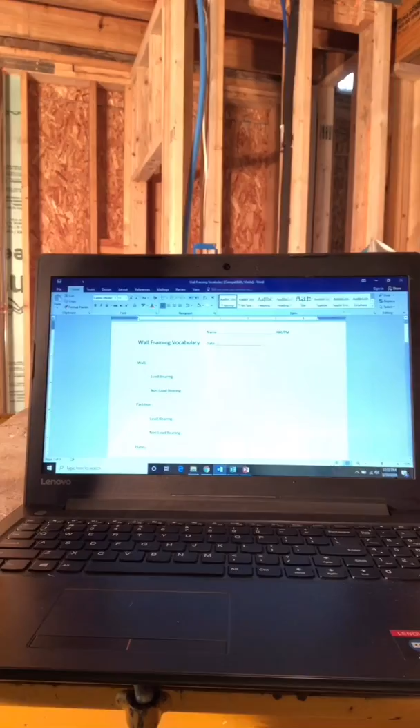If you go online, which I posted yesterday, I had said that you want to download this and you want to start filling it in. So yesterday we did walls, load-bearing, non-load-bearing, partitions. This was your assignment for yesterday. So today we're going to continue on this vocab sheet. We're going to start with plates and we're going to go on down through several of these.

Okay, plates. Plates are the first thing that we lay out on the wall. It's where all of our layout is done. This is where we put all the markings of everything, and we can equate plates to floor framing. That would be the band joists where we did all of our layout marks on there. So these would be the plates.

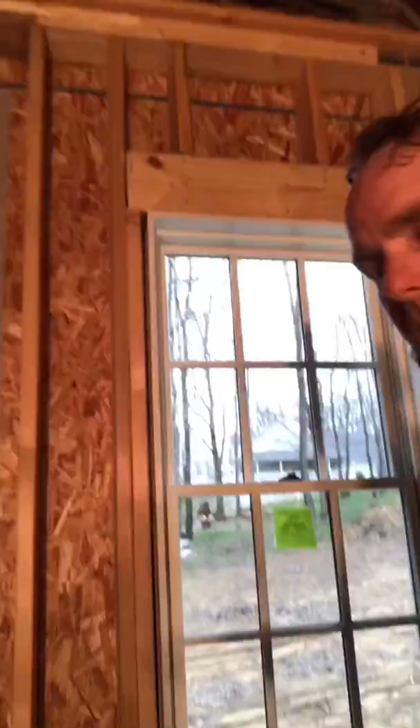In a wall system, you have 3 plates for a typical residential framed wall. The bottom plate, the top plate, and the double top plate, which is up there. So really when we start laying these out, and this is another day's exercise, we lay out the bottom plate and the top plate together, just like we lay out the 2 band joists.

So this is wall framing. This is called plates, not band joists. The plates run the entire length of the building. Anywhere that you have a wall, you're going to have a plate. Depending on the type of wall, you may have 2x6 walls, such as these ones, or you may have 2x4 walls, as we have right here in this partition wall.

The reason that we go with thicker walls is because of the amount of insulation that we want to put in. Typically, that's the only reason that we're changing the thicknesses of the walls. But for most cases, 2x4 walls do suffice, except where you need excessive insulation, like on an outside wall, because of what the building code now calls for.

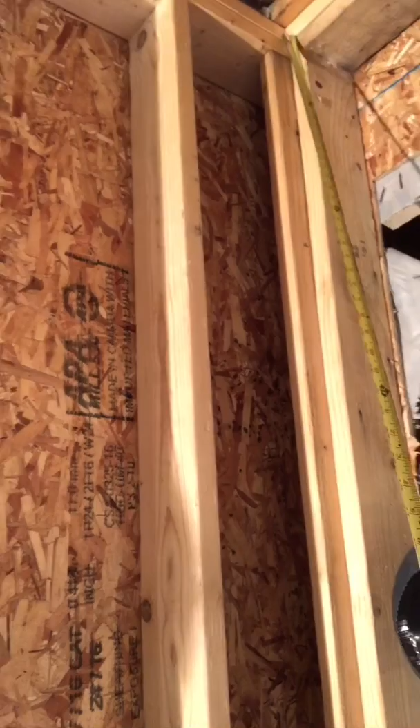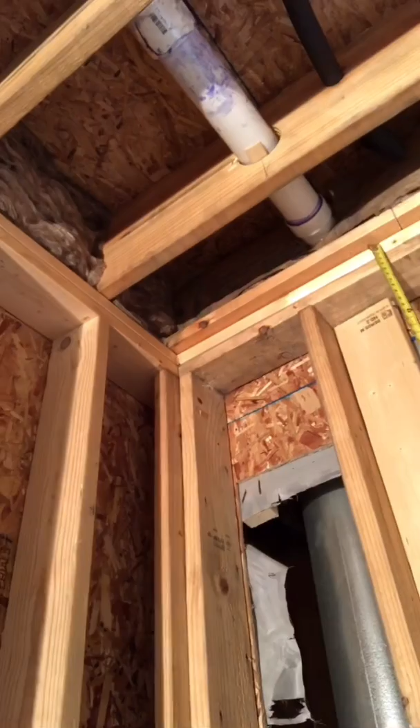The double top plate is an extra board put over top of the wall to stiffen the wall up, and it allows for when we have a splice in the wall. Right here we have a seam, a joint where this wall touches this wall. So how do we tie those together? It's with the double top plate. The double top plate on this wall runs clear through. It stops short, and the double top plate on this wall runs clear through over top of the load-bearing wall.

And the other purpose is at butt joints in your wall. See how we have a butt joint on the 2 plates of the wall? Well, the double top plate splices that over. Now this piece of wood up here, don't confuse that with a wall component. That's just another scrap piece of wood that's nailed down over top. That is a drywall catcher, just something to screw drywall to. Bottom plate, top plate, double top plate.

So we have our vertical members in the wall, the framing members. These are called studs. If you compare it to a floor system, like up there, those are called floor joists, but these are called studs. Studs run from the bottom plate to the top plate, the full length. These are also known as common studs; some people call them that.

But if you just say stud, that's a common term meaning that it runs from the bottom plate to the top plate. A stud, when we do our layout mark, is signified by an X. So when we do our layout mark on the bottom plate, which we're going to show you another day, the symbol is an X. We're squatted down here at the base of the window.

The framing members that go across that hold up the bottom of the window, actually it doesn't hold up the bottom of the window, but it gives support to the shortened studs underneath the window. This component is called the rough sill. The rough sill is made out of the same material that the studs are made out of.

Typically when it's installed, it's turned on a slight, up to probably about 6-degree angle, and it allows, if any water ever gets inside behind the window, to actually run out a little bit. So it's not super important that you put that little bit of cant on the sill, but I always like to do it. It's just a good practice.

Since we're in the business of talking about openings like doors, window sills, rough sills, let's talk about something that doors and windows have in common in the framing aspect: they both have studs in here, which are called trimmers. Now, what is a trimmer? A trimmer is a shortened stud that supports a load-carrying beam over top of the window or the door. They're both identical. They both work the same.

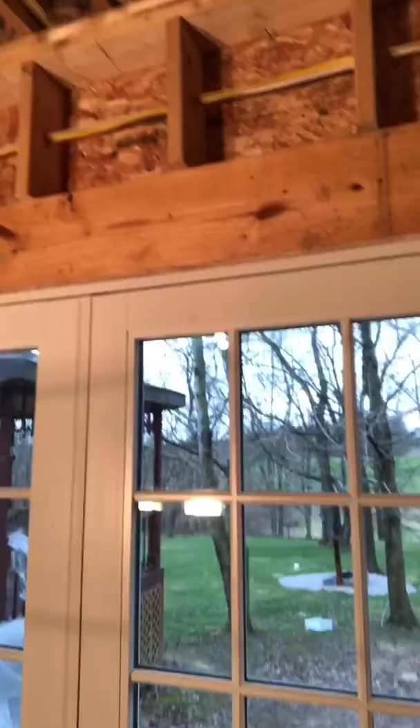But if you notice, when we cut a hole in the side of a building, especially in a load-carrying wall, which would be a load-bearing wall, we're actually cutting out several studs. A header is a component that we put into a wall system to carry the load. In essence, it's a beam. It's a girder, not unlike a girder that you would have in the basement, holding up the center of the first floor.

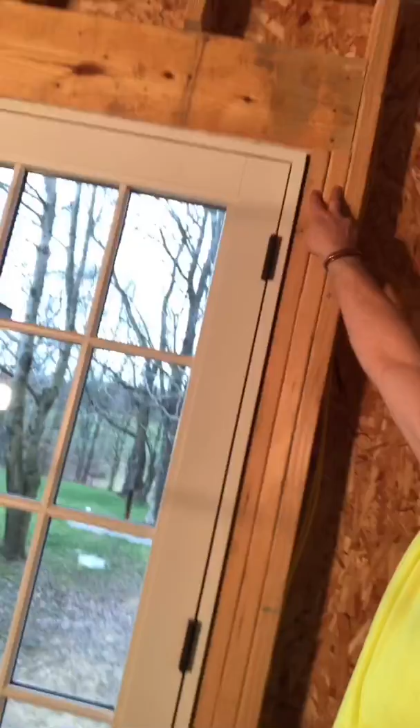But when we cut these studs out, we do have to put something in there. So the weight comes down through these shortened studs, goes into the header, the weight is transferred out, and it goes into these shorter studs here, which are called trimmers. Okay, so a header is typically made up of several pieces of 2-by material. Let's take a peek right up over top of there, and you can see it's actually 3 pieces of 2x10 tripled up to give strength for that wall.

Now, here are the trimmers, and these have to be set. The height of them has to be determined, but that's another day's lesson. The trimmers are the shortened studs that hold up the header, whether it's a door or it's a window. And in this case, take a look. We only have one trimmer in here. One trimmer is good enough because look, we're really only cutting out 2 studs.

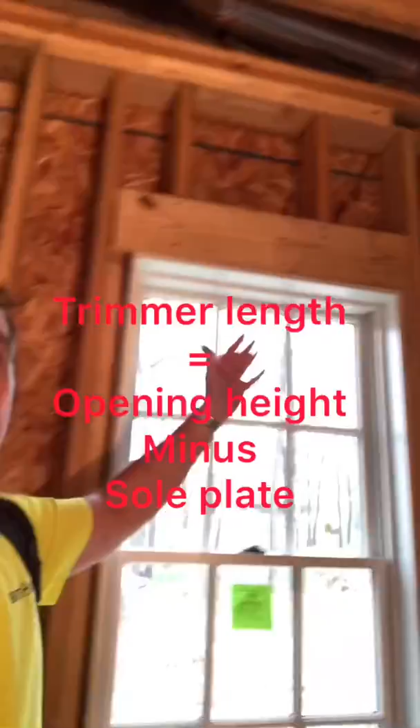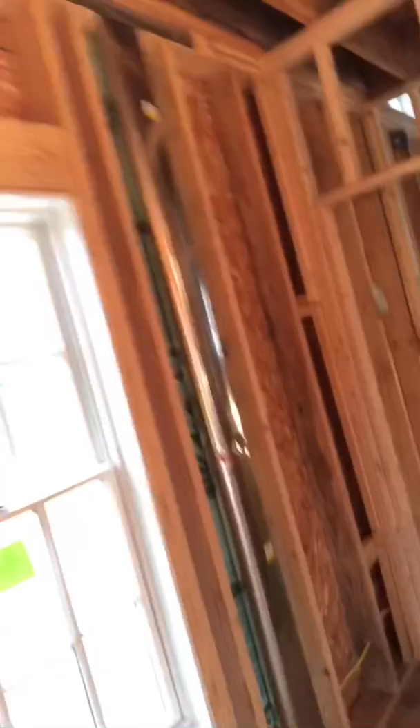And when I say cutting out, it's not like we frame the wall and then we get in there with a chainsaw and chop the opening out. We frame the window as we go. But we took out some studs above. We need to replace it with something, and that is what supports our header. Our header cannot simply be face nailed in there and held in place with the strength of nails. It is going to be held with the strength of the trimmers.

It's very, very important that the trimmers are nailed together with this stud. This is a king stud, the outside one. The inside one, the shortened one, is the trimmer. And it's nailed in a likewise fashion of sistering any wood that we do. So typically about every 12 inches, we have a zigzag pattern of nails between these two boards to make them one. They have to become one. If they don't, then you're defeating the purpose of what you're trying to accomplish here by strengthening it up.

Trimmers, the bigger the opening, the more trimmers you need. This 6-foot opening has 2 trimmers on each side because there's such a big opening, and this being a load-bearing wall, it's carrying all the ceiling up there. So it takes a tremendous amount of weight because this is carrying everything that's sitting upstairs. This opening over here, as you can see, we ended up putting 4 trimmers, 1, 2, 3, 4, to carry that beam up there. That's the header, okay? And we had to do the same thing on this side. We put 4 trimmers.

So what is the marking? How do we mark on the sole plate and the top plate where a trimmer goes as opposed to a stud? Well, studs are marked with an X. Remember, a stud is a component that goes from floor to ceiling, from bottom plate to top plate. Trimmers go from sole plate to header.

Under our windows, we have a component called a cripple stud. It is a shortened stud, very short. It's cut to the length that you need to go from the bottom plate to the rough sill. So that's all I can really say about that. Cripples are also used up top for over top of the header. They take up the space between the header and the top plate.

Making up our corners of walls or partitions, we utilize something called a corner post. The reason we call it a corner post is because it's 2 components nailed together. They're just studs that are nailed together. Remember, studs are full length from sole plate to top plate. Corner posts can be made one of 2 ways. There's a more popular way that we're using nowadays, but when I got started on it, this was the way to do it.

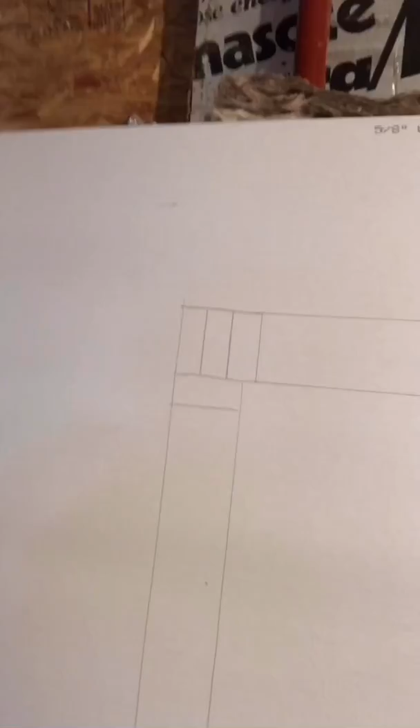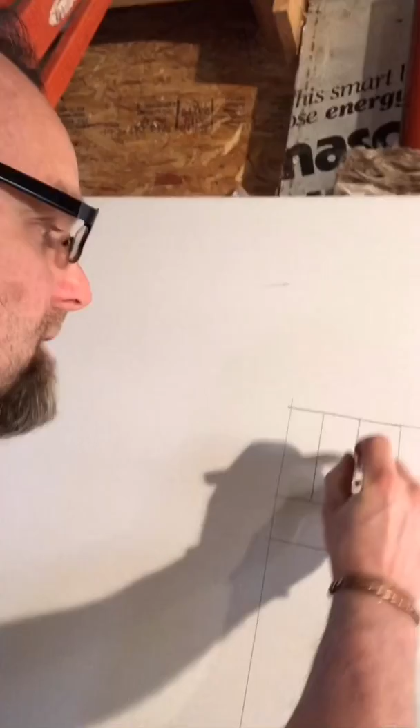I'll show you a little drawing I have here. This is looking down on your wall. So this would be a sole plate, this would be the other sole plate. And in here we would put together 3 studs. So we would frame this wall first and we would put 3 studs together. We would usually use blocks in between there. They call it an XBX corner for that reason. X being stud, B for block, X is a stud also.

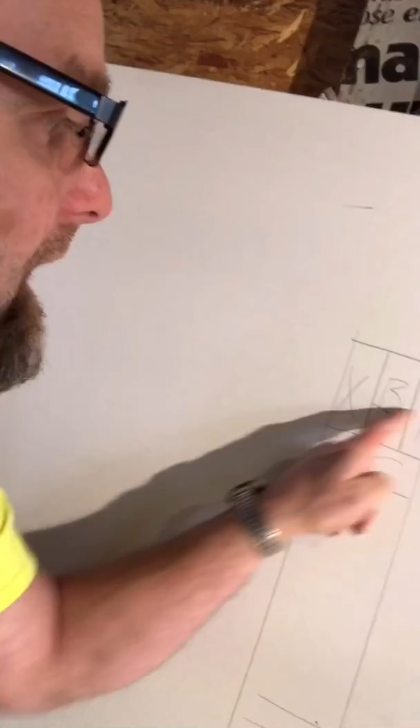So that wall would be framed and we would put another stud here, and our other studs would be at 16 inches coming up this way. So this would make our corner. XBX posts are not the popular thing to use anymore. The problem being is that you can't get insulation behind there.

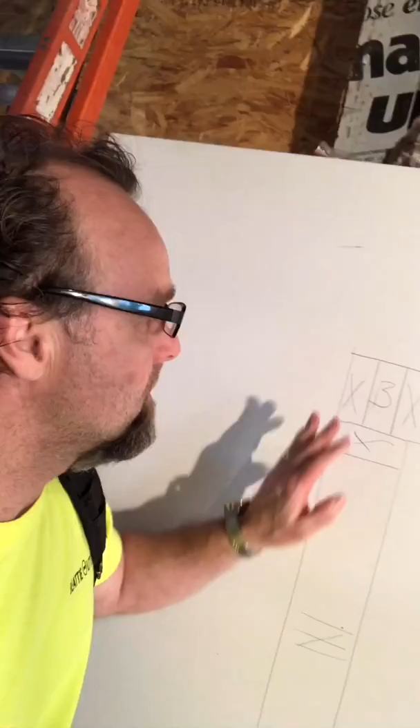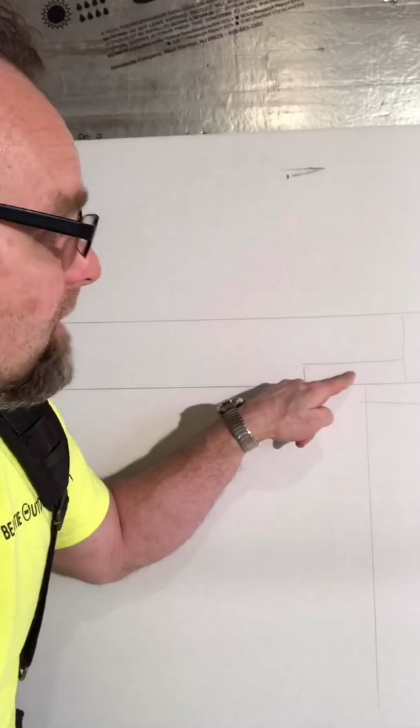So a new modern way to build corner posts is to do this, where we take 2 studs, and the best way to do this, honestly, is to nail these together in place on a set of horses so you can get the edges straight on them. You'll nail these two studs together. If it's a 2x4 wall, you'd be using a 2x4 and a 2x4. You would nail one this way, and you would put it into your wall system. So this would be a stud, and this would be a stud.

And then we would frame the other wall and butt it to it, and there would be a stud against there. So now you can see how this makes a corner. This gives you screwing for your drywall into here and into here. It also leaves an open cavity for you to stuff insulation behind. You can also drill holes through this much easier and push wires through. It's a better system all the way around. This is why most builders have gotten away from the XBX corner post.

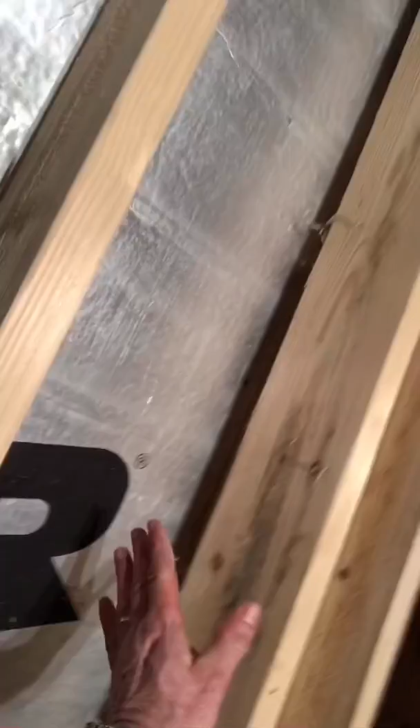So here's an example of one of these energy efficient corner posts. This is called the energy efficient corner post. So you can see this is a 2x6 framed wall, and we just took another 2x6 and we turned it flat ways, and it's touching the other stud, and that gives you a very nice corner. You have plenty to screw to, and look how easy it is to put those wires through. We drill one hole through and we could fish the wire in there. I could reach around back and pull it right around the corner.

Here's our wall again, and here's our intersecting wall that is tying into it. So this would be your first wall that you have up, whether it be a wall or partition, doesn't matter. Typically, this would be your load-bearing partition or wall if it is, and the other non-load bearing ones would butt into it.

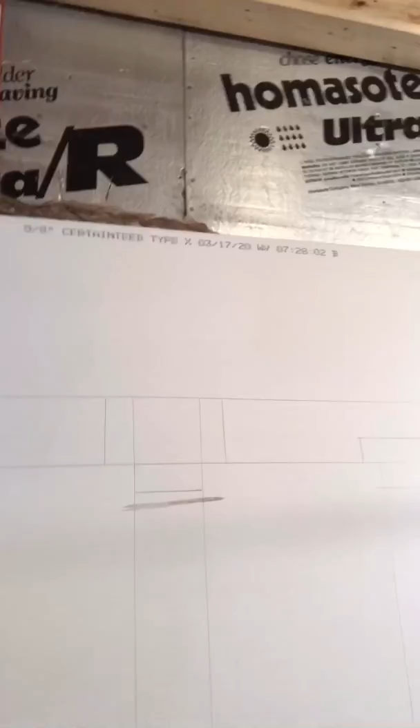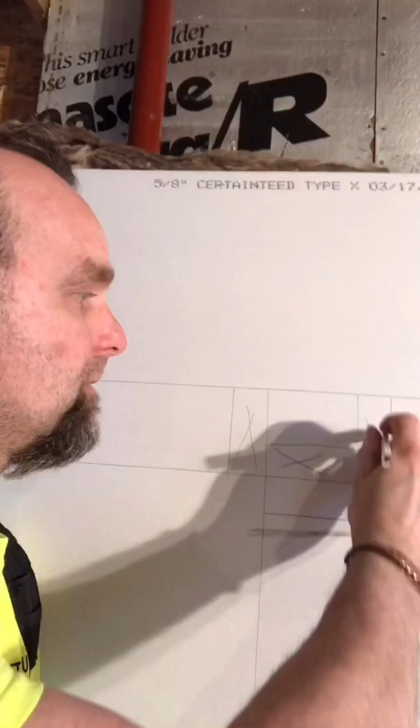So the old way to do that would be to take 3 full-length studs. We would put one here, and one here, and they'd be nailed together in a fashion that looked like a U. The other intersecting wall would bump right into it, and it would be a stud against a stud. Once again, the problem is there's no insulation behind here. It's also very difficult to get a wire to come around that corner.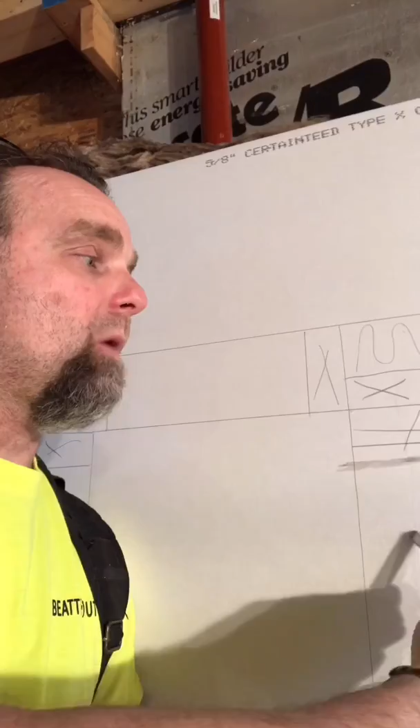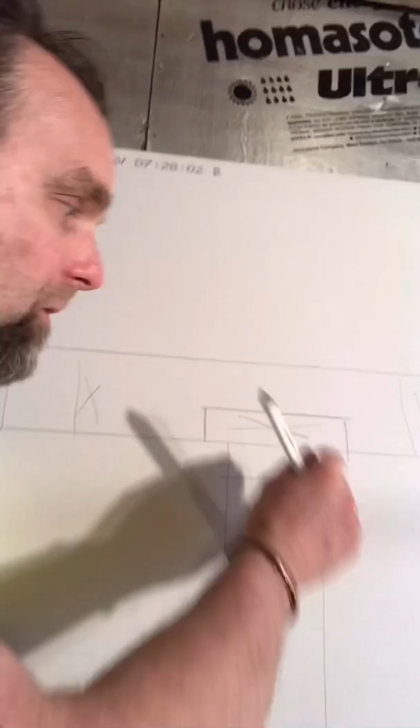But with the green way of doing it, we would have our normal studs in our wall wherever they fell, and we would put a wider stud in there than what we're using. So if this is a 2x4 wall, we would go up to the next size, being a 2x6. The 2x6 is wider than the wall, so it would be nailed onto the back side of this stud on the end of the wall. That allows you to put insulation behind here. It allows you to drill a hole and put wires right through.

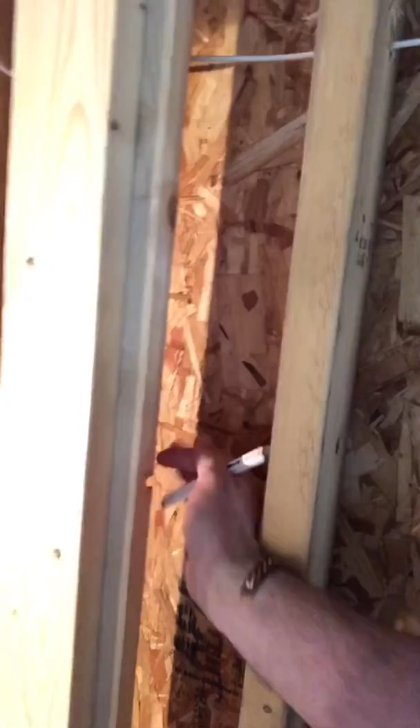And that's exactly what we have happening over here. We have this intersecting wall or partition coming into this wall right here, and we made up the post. You can see it's just a 2x4 backed up with a 2x6. Now it's going to let us put our insulation back behind there real nice. And if we did need to run wires through there, easy peasy, plumbing, whatever it may be. Drill one hole, put it through, turn the bend.

The partition post length is determined by the length of the studs. It's basically just a stud that you take and you work into the wall system. So a load-bearing header is made up typically of 3 pieces of 2x. So we're looking down on that header, 3 pieces of 2x put together. Now it depends on the width of the opening and how much weight it's carrying above how many boards you have to put in there. Typically if you put 2 or 3, you're okay.

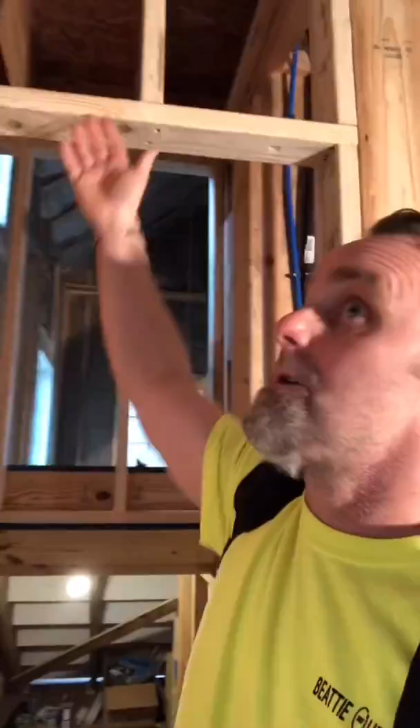Over here, this being a non-load bearing wall, you can see we can get away without a header because there's no weight at all pushing down on here. The weight of this ceiling actually runs out to that, and there's a beam in that ceiling system which is carrying the weight. This is a non-load bearing wall, so it needs no header. But any load bearing walls do need headers placed in.

In this case, my engineer spec'd out 3 2x8s for over top of these windows, and he spec'd out 3 2x10s for over top of that door because it's so large. In other cases, such as garage doors where you're carrying a very wide opening with a lot of roof sitting on there, many times they'll spec out 3 LVLs, laminated veneer lumber. It could be up to 14 inches wide. So that's something you have to check with an engineer on.

So how do we come up with the length of the headers? The header's length is determined by the opening width plus the thickness of all of your trimmers. Now remember, the bigger the opening you go, the more trimmers you need to have underneath there. A typical good rule to follow is for every full-length stud that is cut and a cripple put in there, you would need that many trimmers.

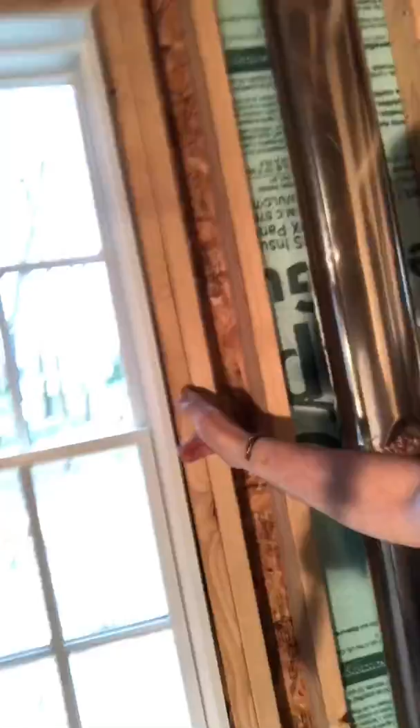So look up, count how many cripples you have. That's how many trimmers you're going to need. I have 2, so I got 2 trimmers. Now bear in mind that you need an equal number of trimmers. If you're going to have 2 on one side, you need 2 on the other.